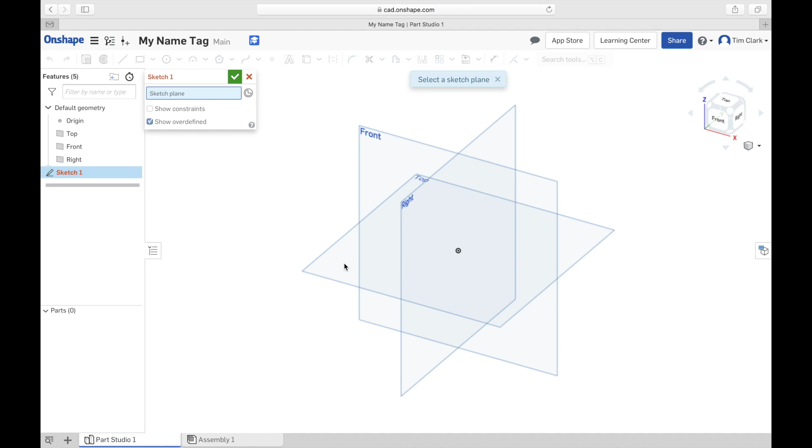So step one is to draw the basic sketch that we need in order to create our name tag. So we're going to start by hitting create sketch, and we're going to select the plane that we're going to draw it on, which is the top plane, and we're going to click on that. It's going to open up a sketch on the top plane, and if we tap on the top button, we should be able to look down from the top view and see our sketch area.

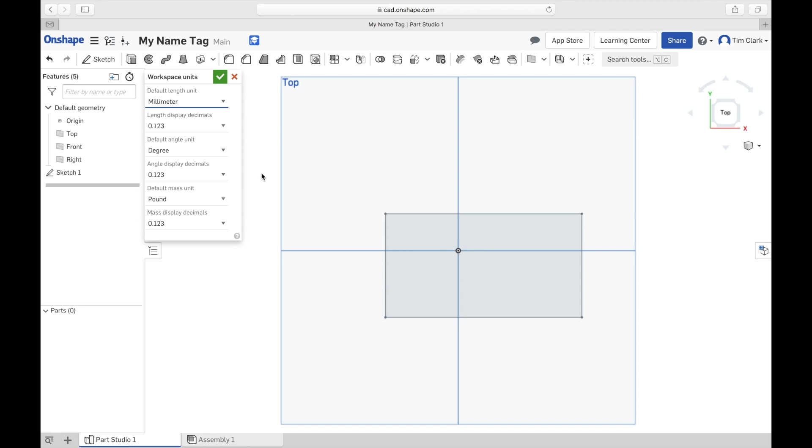We're now going to draw out a rectangle. Our rectangle is going to go out here, and notice straight away that our measurement units are wrong, so let's change those. Our workspace units are going to be millimeters, and then I'm going to press tick. I'm going to have to double click on this sketch to go back into it. I'm now in my sketch, and I can call this sketch name tag main.

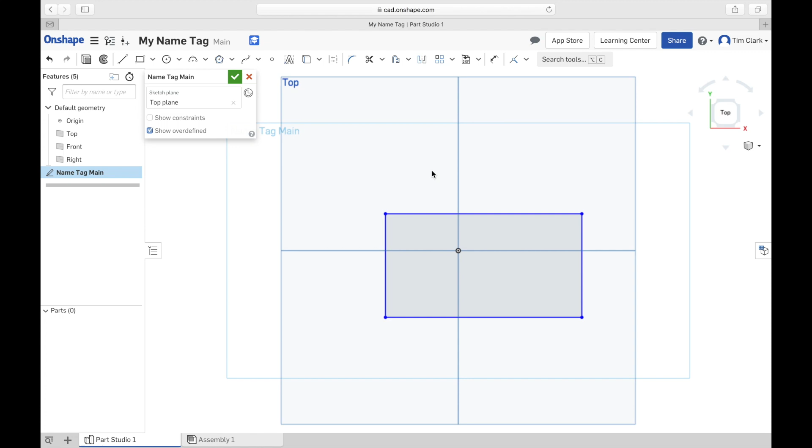So in the name tag main, I'm now going to use the dimensioning tool, which is up here, to click on here, let go, and then click up here, and our cross dimension is going to be 78. And I'm going to click here and click out here and let go, and our up dimension is 39. So those are the size of our name tags.

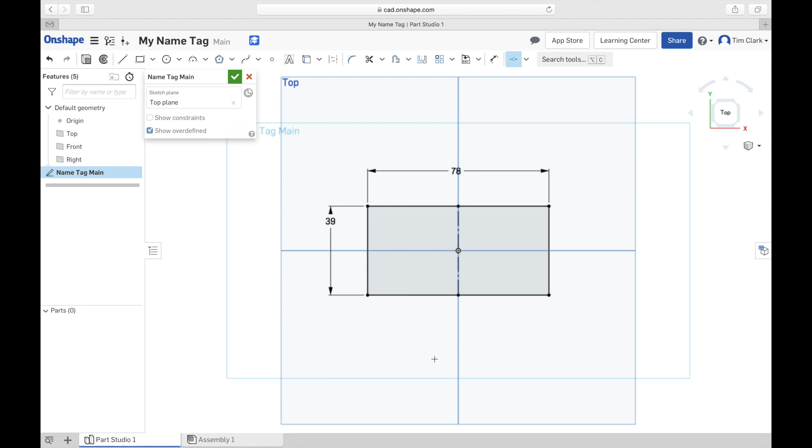Now a really good trick to get this perfectly in the middle is to draw a line, but to draw the line using the construction tool. So if I click on that as well at the same time, I want to draw my line from this midpoint here down to this midpoint here, so those two squares that appear, and you can see I now have a construction line. I'm now going to use the midpoint tool, which is here, to click on this line, and I'm going to click on the midpoint there, and that's going to lock it in place. So now that I've finished my name tag sketch, I'm ready for the next step.

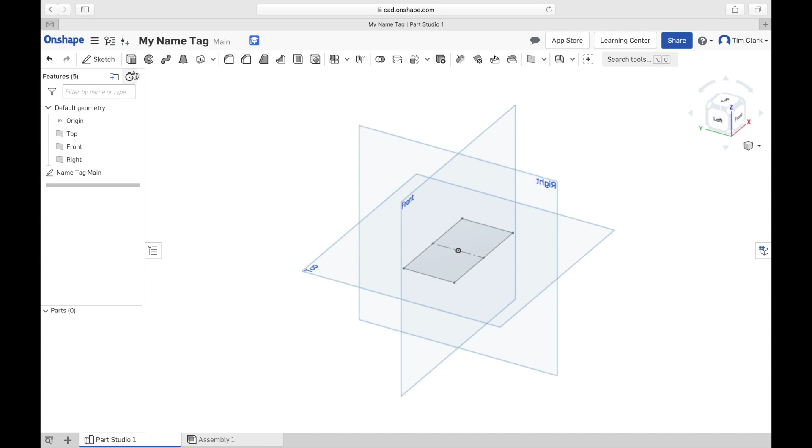So the next step is to extrude the shape. It's easy to extrude the shape if you click on an angle like that one there, so you're viewing it in a sort of a 3D view. I'm going to click on the extrude button. I'm going to click on the area I'm going to extrude, and I'm going to change the dimension now to 3 millimeters. I'm going to press on the tick button to save that, and that is my extruded shape.

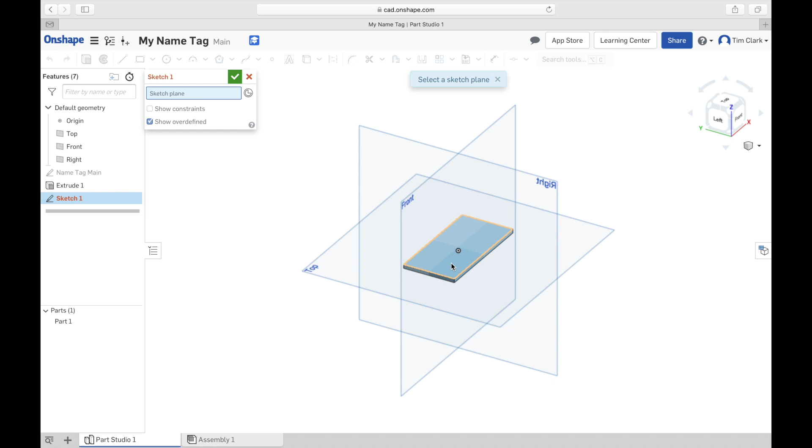It's now time to draw in our text, and I'm going to use the sketch tool, and I'm going to click not on this top here, but on the top surface of my name tag. It's important that you click on the top surface of your name tag. I'm now going to press the top view so that I'm lined up perfectly, and I'm going to pick the text tool here, and I'm going to drag out an area of roughly that size.

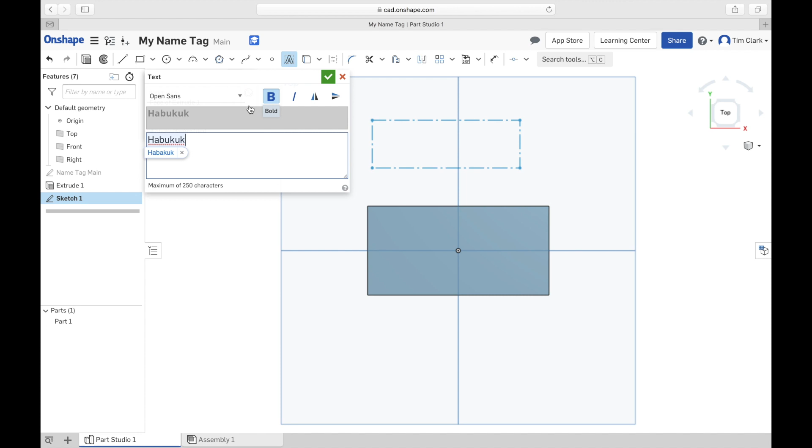I'm going to put my name in, and I'm going to pretend that my name is Habukuk, which is a nice name that actually fits a few letters in it to show you what it's going to look like. I might choose bold to make it bold, but I don't have a lot of choice of font here, so I'm going to stay with Open Sans, and I'm going to press the tick button. And you can see that my font is way too big to fit on my name tag.

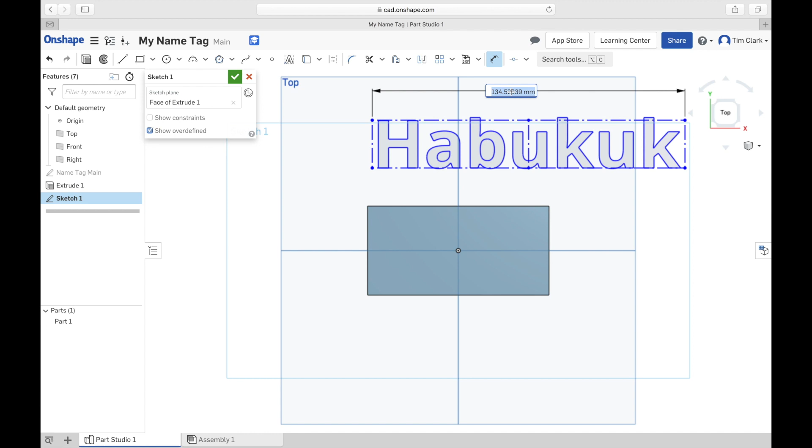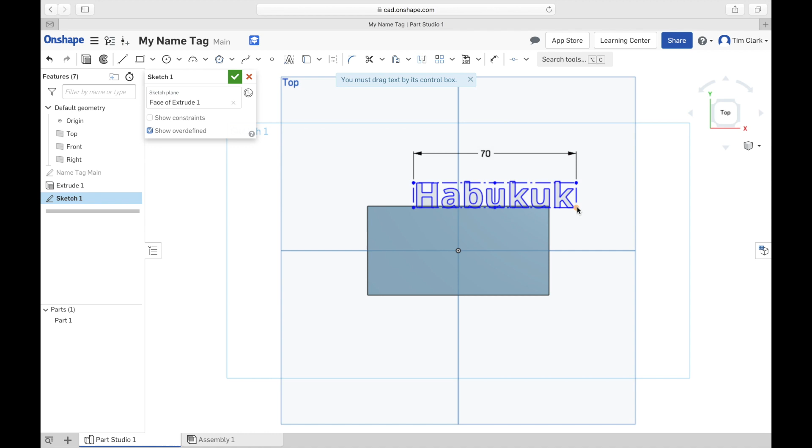So the first thing I'm going to do to make it fit is to dimension it up here. Now we remember that the name tag was 78 millimeters wide, so if I make it 70 millimeters wide, that will make it definitely small enough to fit on. I'm now going to press escape, and I've got the arrow key selected. I'm going to drag the name into place, probably by the corner. Yeah, you've got to drag it by the corner. That's bad of me to not know that.

And now I'm going to press the dimension key, and because it's 70 and this is 78, I've got 8 left over. If I want it in the middle, I need to move it from here to there to be 4.

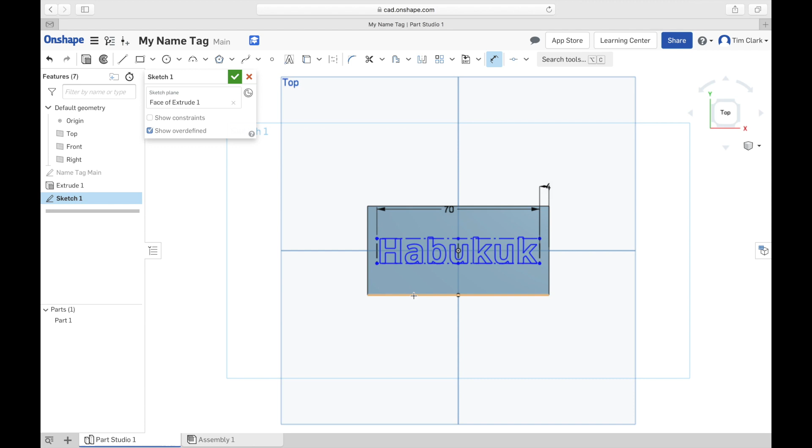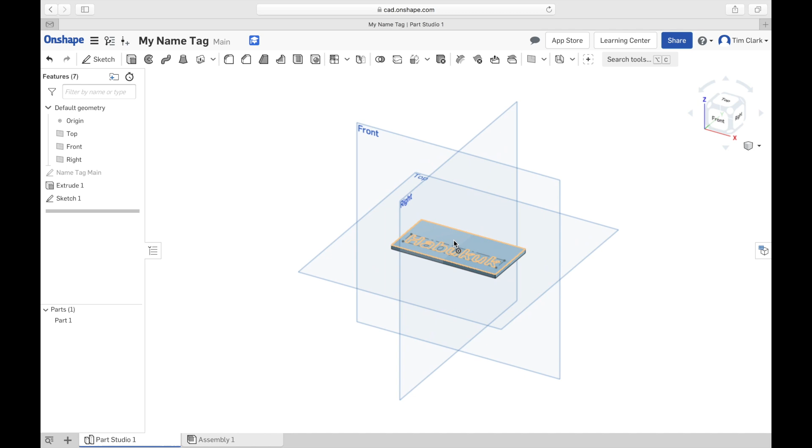So it's now in the middle, and I'm going to put it closer to the bottom, so I'm going to use the D key here to put it closer to the bottom. I'm going to make it maybe 8 from the bottom, and that's where my text is going to go. I'm now going to stop that sketch. I'm going to press on this button here so I can see what it looks like. That's better. Might zoom in a bit. And that's what my text is going to look like.

I can now extrude my text by pressing on the extrude button. I'm going to do this twice so you can see it happen. First time I'm going to click on this and I'm going to extrude it up by the full 2 millimeters that I'm allowed. And I'm going to press tick. So that's what it would look like fully extruded. I'm going to undo on that and I'm going to do it again.

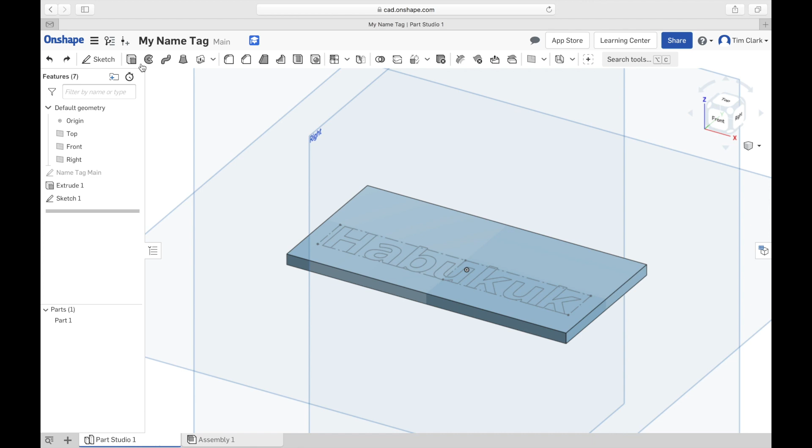This time I'm going to extrude it on the text, but this time I'm going to remove it, and I'm going to remove it by 2 and press on the tick. It's now going down into there and I think I like that better. So that's the extrusion that I'm going to do of my text: 2 millimeters deep into my name tag.

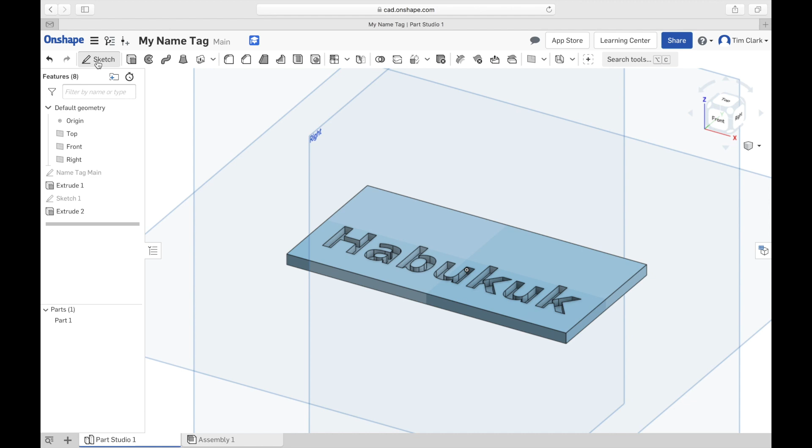I'm now going to add a through hole, and the through hole I'm going to put in my top left hand corner. So basically I need to create another sketch on there. And I'll look at it from the top view now, and I'm going to zoom right in on my top corner, and I'm going to use the circle tool. My circle only needs to be 3 millimeters. So I'm going to click on that and I'm going to use the dimension tool straight away to dimension that and make that 3 millimeters and press enter.

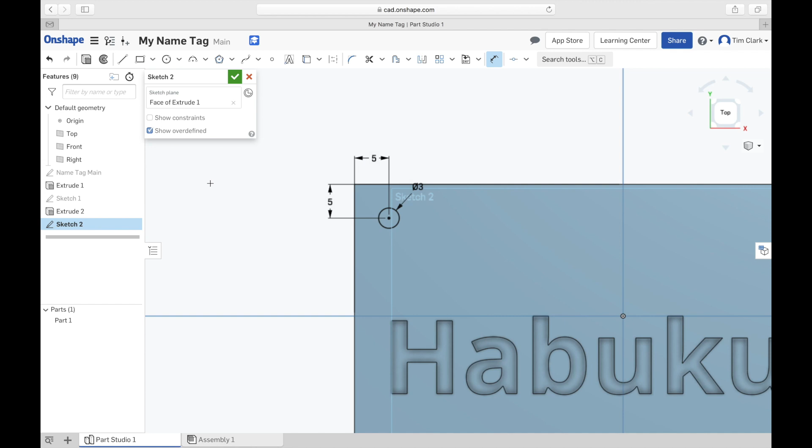I'm then going to use the dimension tool again to click on this line here, then click on the center of the circle and move that in 5, and the same from this one here to this one here of 5. Now that I've got my through hole, I just need to extrude it through. So I'm going to hit on stop sketch. I'm going to hit on the top view there so I can see it.

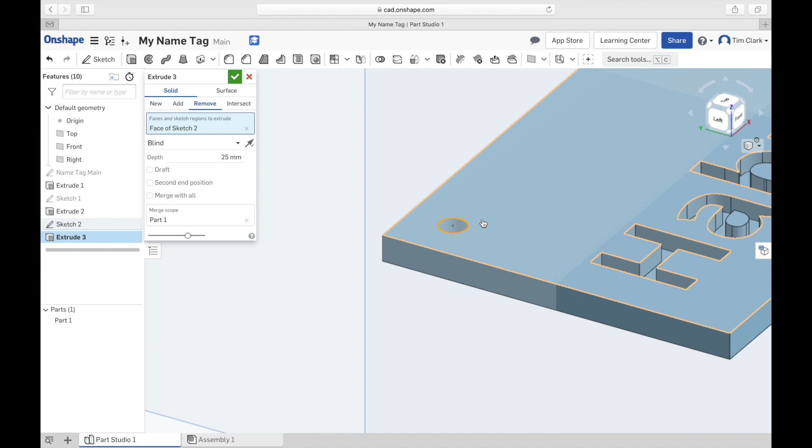I'm going to zoom in a bit so that I get a nice close look of it. And I'm going to extrude that through. And it's going to be a remove. And because it's going down 25, it's going to go all the way through. And I'm going to press the tick button. So there's my basic name tag. I now only need to add some decorative features.

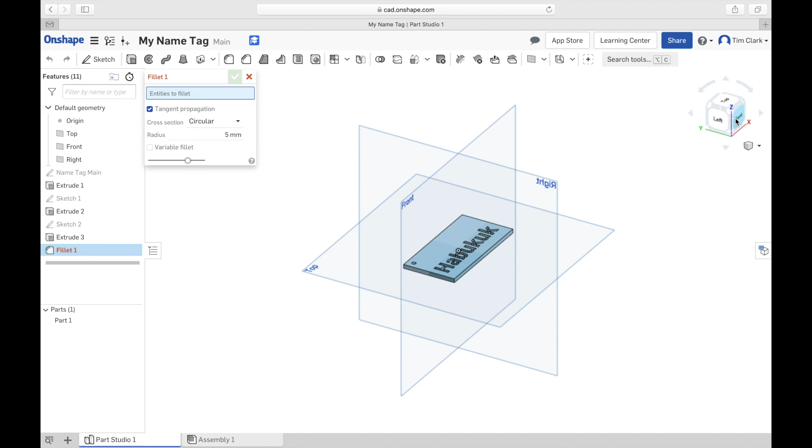The easiest decorative feature to add is always the fillet. And I might just add a fillet just to this one edge over here. So I'm going to rotate around to this side here. And I'm going to zoom right in so I get it right. So I'm going to add a fillet to here. And my fillet currently is 5. I'm going to make my fillet a lot larger by dragging in. Maybe that's too large. There we go. And I'm going to press tick.

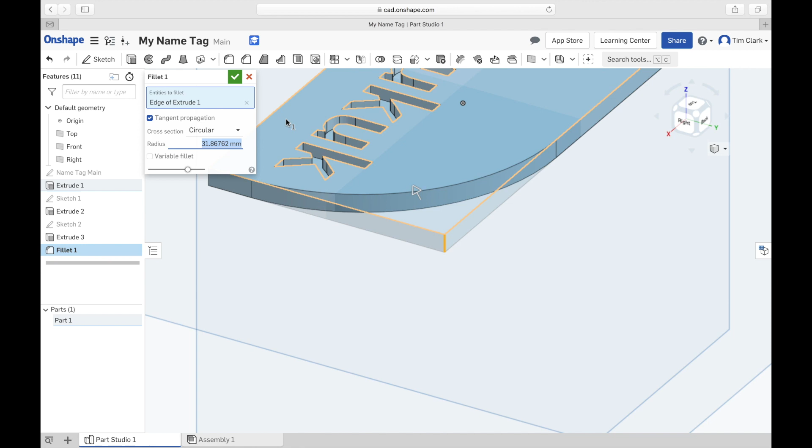And now I'm going to zoom back out so that my name tag is around the right way. And that's what my name tag is finally going to look like. That is a very basic name tag. You need to do your own features in order to make your name tag more a part of what you are and to try and give it its secondary purpose.